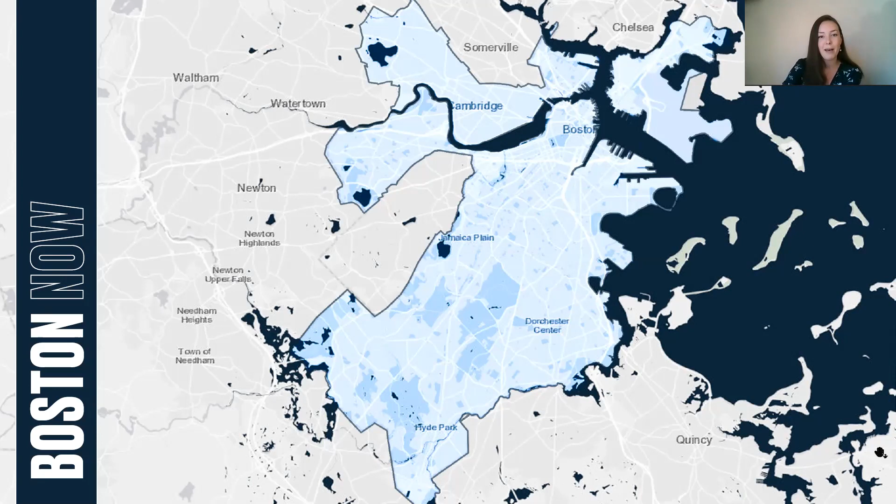So most of you know that this is Boston today, and some of you Bostonians might recognize your neighborhood here on the map. If you want, you can type that into the Q&A box where you're from.

These are the challenges facing Boston in the future. Some of these are the largest effects of climate change: extreme heat, flooding, and coastal storms. Although this may look like a lot of the city is affected, and it is, we really hope to create a hopeful approach today and understand how design can help reduce these challenges.

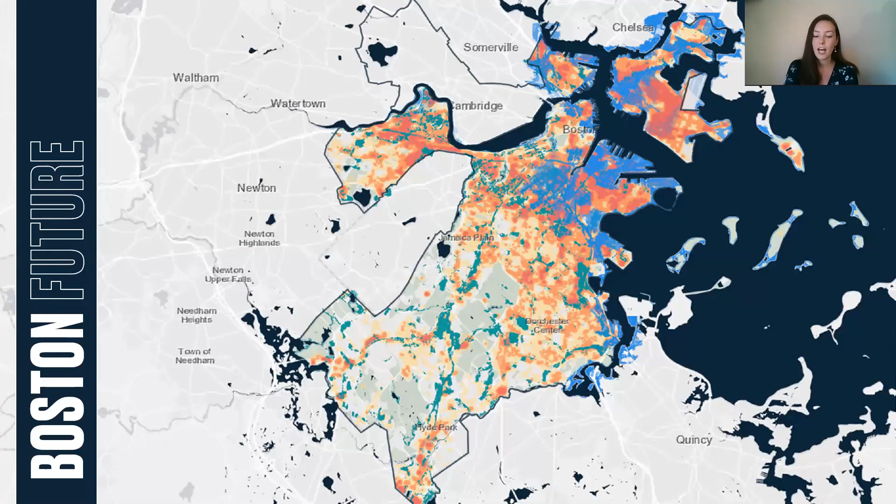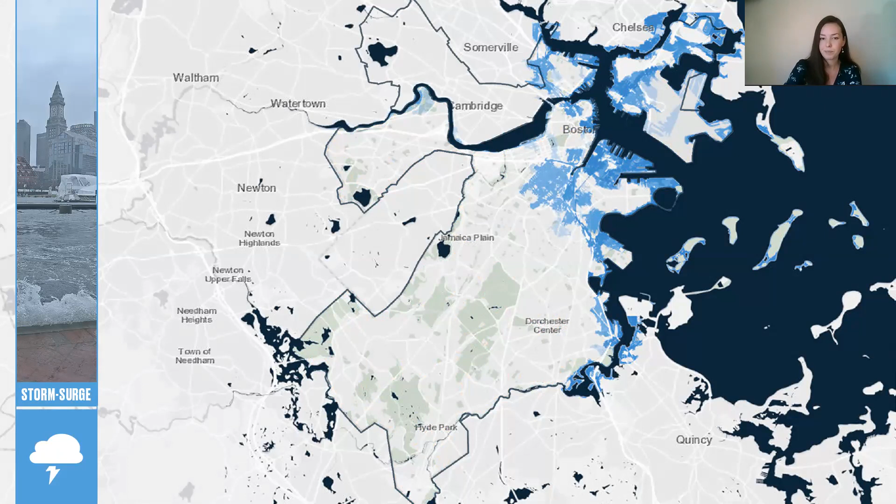So we'll start with storm surge. Because Boston is surrounded on most sides by water, sea level rise is one of the first things this city researched. This map shows areas of Boston that will flood in the next 100 years, but it may also flood up to 2 times a day depending on high tides. Rising seas and more powerful storms cause heavier rainfall in shorter periods of time, and with fewer places for this water to go, many of those low-lying roads and areas will start to flood more frequently. Some of you may have noticed already flooding as you walk, bike, or ride around the city.

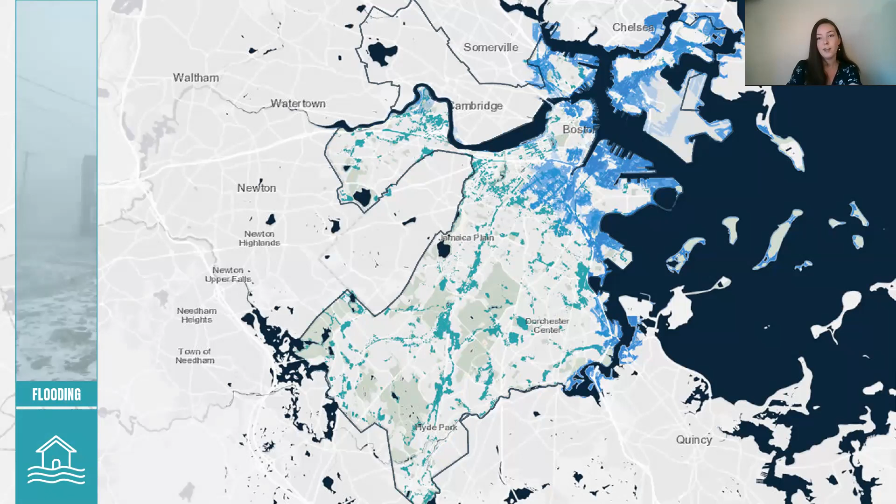You might be wondering what all this red is. The darker the red, the hotter the area is. Although we do have a lot of parks and green spaces in our city, it's also like a lot of other cities made up of asphalt, concrete, and other surfaces that trap the heat and make it even hotter. Excessive heat is one of the biggest problems caused by global warming because it leads to droughts, fires, and uncomfortable living conditions.

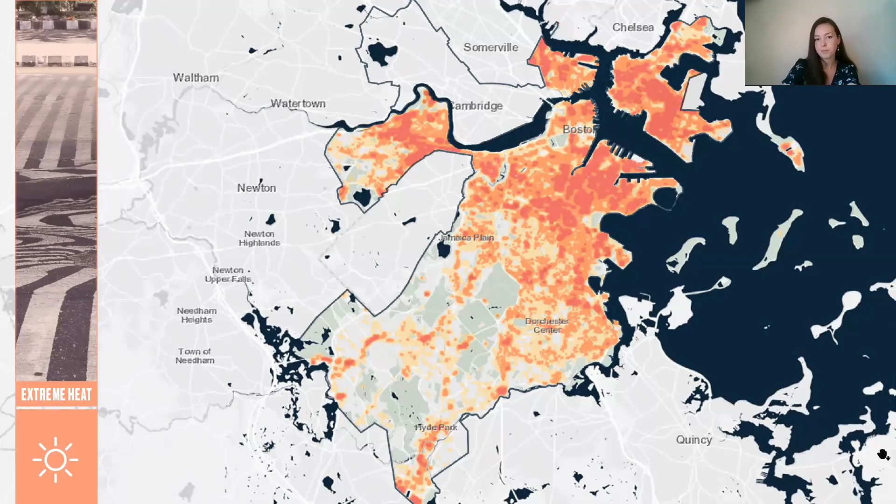But there's plenty of things we can do about all these things. Over the last several years, the city of Boston has started to make plans to make our city more resilient to the challenges caused by climate change. In this effort, there are landscape architects, engineers, and other designers who are all working together to reimagine our shorelines, our city, and all the buildings that make our city.

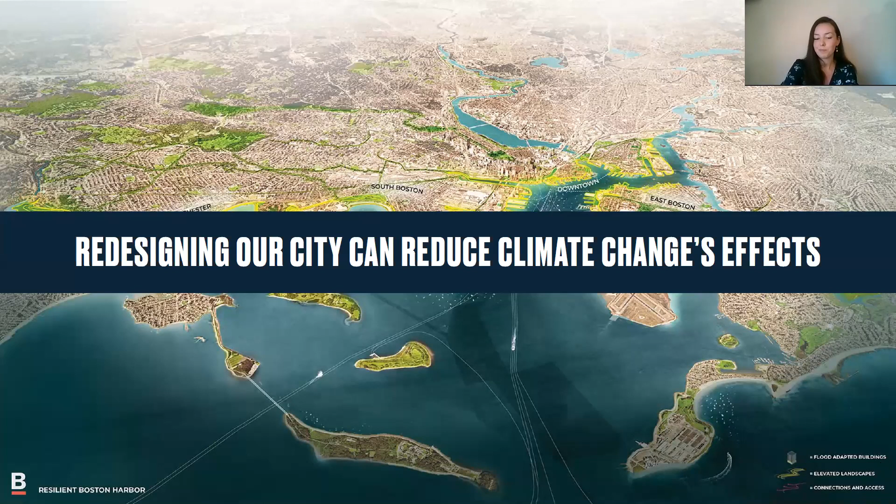Designers also need to think about not only how to solve for climate change, but they also want to design to reverse climate change. In the next several slides, you'll start to see how designers are doing just that, maybe focusing on flooding or on how to reduce global warming overall.

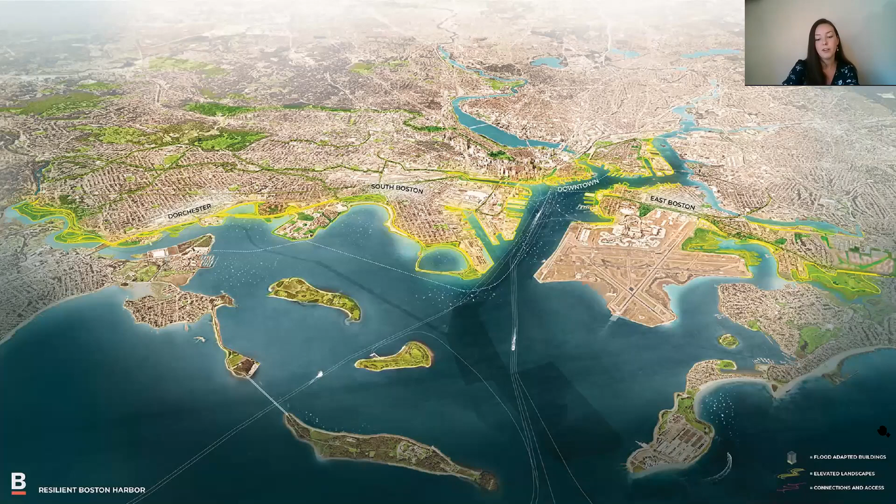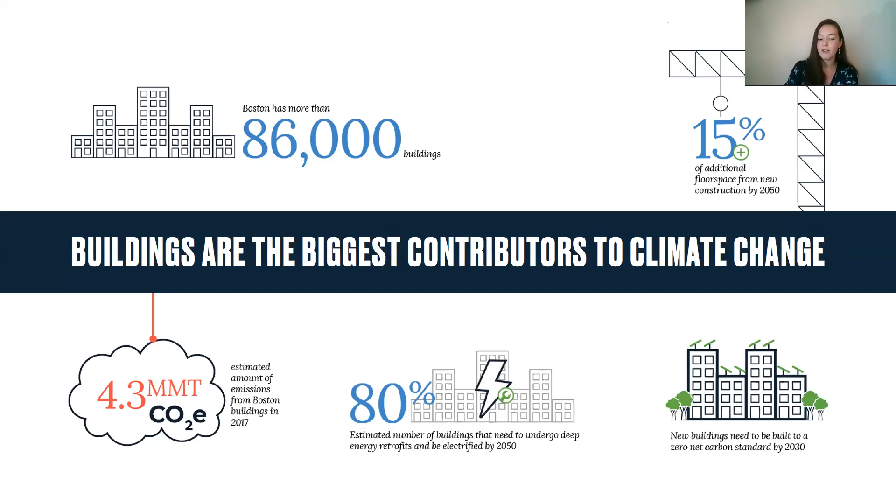One of the biggest causes of global warming is an excess of carbon in our atmosphere, and buildings are some of the biggest carbon emitters, so that's really what we should focus on. Boston's buildings account for about 71% of carbon emissions through energy use and construction. With many buildings to repair and build anew over the next several years, the city has a new set of standards so that in the next 10 years, buildings will have to lower the amount of carbon emissions they emit into the atmosphere.

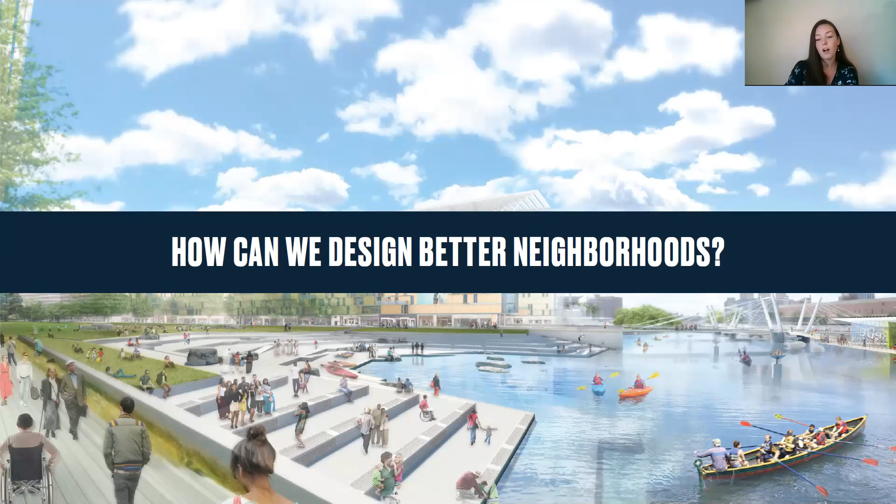Our neighborhoods, like many of you mentioned before, are made up of buildings, parks, and infrastructure like roads, bridges, and sidewalks. The way we design our neighborhoods can help lessen the effects of climate change while also making them healthier and more beautiful places to live.

So go ahead and type into the Q&A box what you see here in this image. What are some of those features in this neighborhood design that are helping to tackle climate change?

So I see no cars. People are seeing solar panels, water at the edge of the neighborhood. People are noticing trees, definitely noticing the water. Someone notices that it looks very clean, the air looks really clean. That's pretty good, very nice. Green buildings. Stairs so that the water can rise without damaging property. That's a pretty good observation. Rowboats instead of electric boats. Really great answers, clean water. So you guys sound like you know what you're talking about.

I see a lot of those things too, and you might not recognize this neighborhood at all. That's because it's a design proposal by a local architecture firm, for a waterfront neighborhood downtown. With many of their design choices that you see here, they are trying to address some of the challenges we were just talking about.

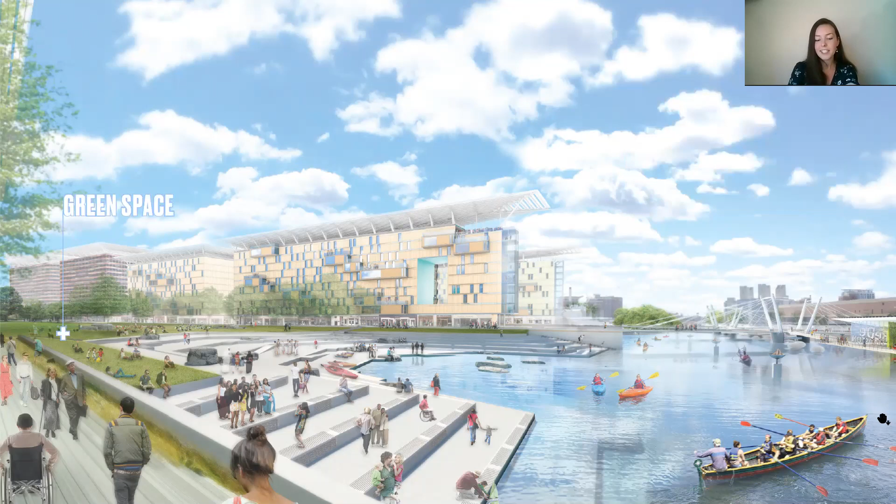In this neighborhood, I see green spaces that help to protect the buildings around it from flooding, while also decreasing heat in the whole area, helping to absorb, shade, and cool down the neighborhood. There's a step shoreline that allows for higher tides to rise up slowly and for the water to be absorbed into the grass, protecting the buildings around it.

Even the buildings themselves do this as well. They have space for ventilation, which means air can pass through them and cool them down. You can see that through the cutouts throughout the buildings, and then plenty of space below the roof.

Those roofs probably look a lot different than the roofs in your neighborhood. They definitely look different from mine. But they are cool roofs, and they provide shading for the building with that big canopy. The white color also helps to bounce off heat and cool them down. On top of the roof, there's also solar panels, which help collect energy from the sun to reduce the amount of energy that the building has to use overall.

As we're zooming in from the city to the neighborhood scale, we can now zoom in even further to the building scale. The same design choices that happen at the neighborhood scale happen to make better buildings that have lower carbon emissions and a more positive impact on the environment.

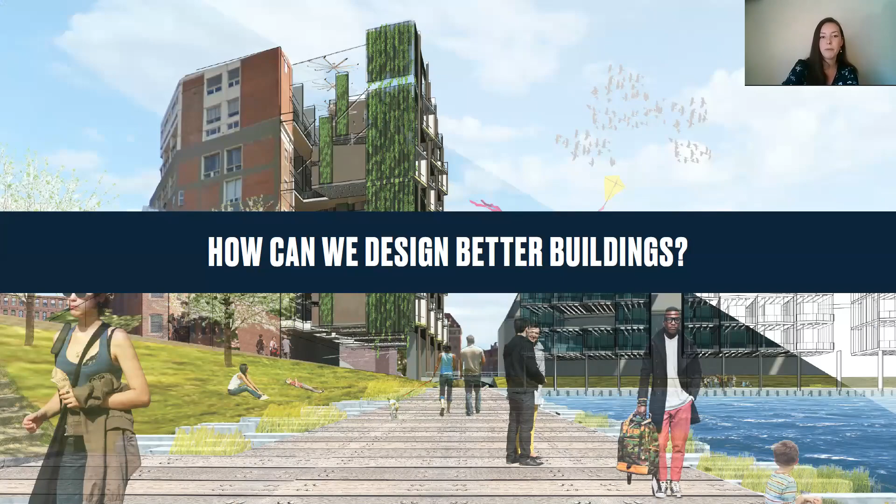Designers have many different tools they can use to make their designs low impact. They can decrease the effects of extreme heat by using ventilation, bringing in air to help cool the building down. They can orient the building and position windows and doors to allow more air flow, and they can use plants and greenery to shade buildings and outdoor spaces, creating cooler climates with cool, fresh air.

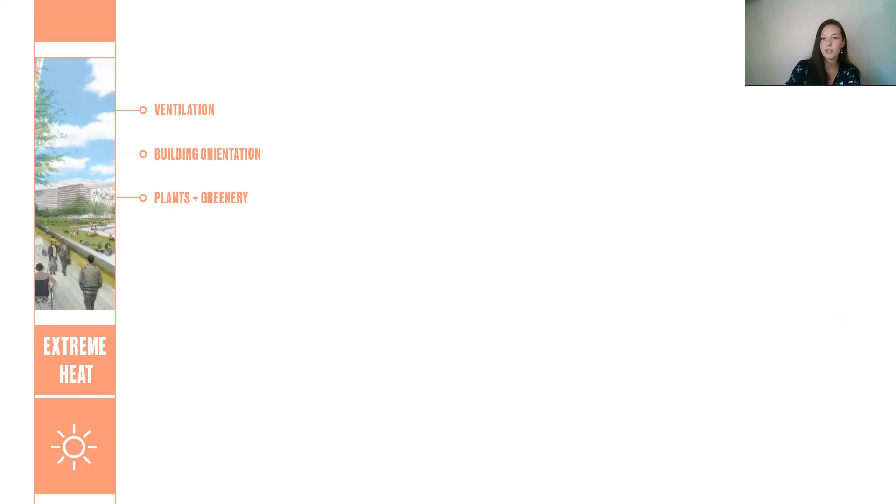To make sure buildings are safe from flooding and don't flood others, designers can use landscape techniques such as step landscapes or stepped shorelines to help manage water. They can elevate buildings away from the water, or relocate building services, meaning the boiler and mechanicals that run the building are moved up so they're not flooded on the lower levels.

Lastly, they can also reduce energy, and one way is by producing your own through solar panels, geothermal, or wind. You can also use building orientation, turning the building so it faces the sun, and use material choices that create an energy efficient exterior. There's really a lot you can do to help lower a building's impact.

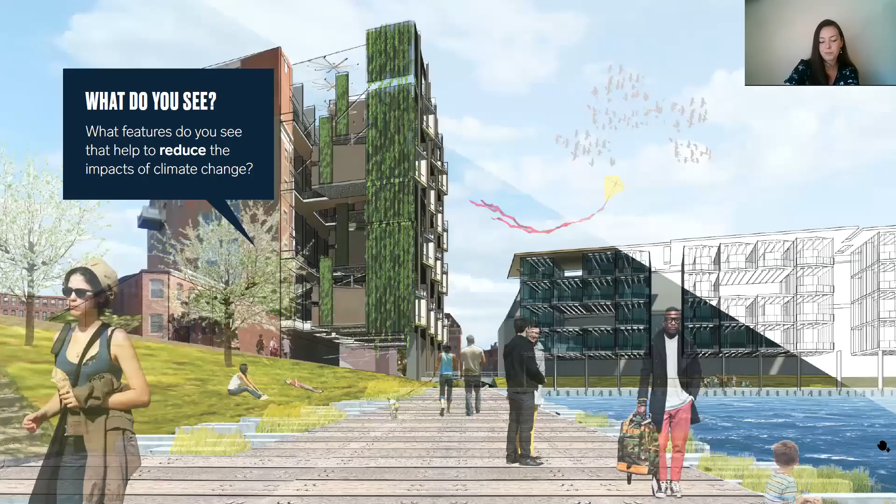So like we did before, go ahead and type into the Q&A box what you see here. What features of this building stick out to you that might help tackle climate change?

People are seeing the green wall, trees, greenery, something on the roof - yeah, I see that too. Open space, clean air - these are all really good answers. Park, solar panels, wind power, water. It's great, very nice. Looks like you guys can do my job for me.

This building is a design proposal, another building that doesn't exist yet but hopefully will in the future. It's done by another local architecture firm, Lab Architects. Like you all started to observe, I see living walls, which help cool the building down and purify the air around it. You'll be learning a lot more about living walls and how they work from EcoRise later today.

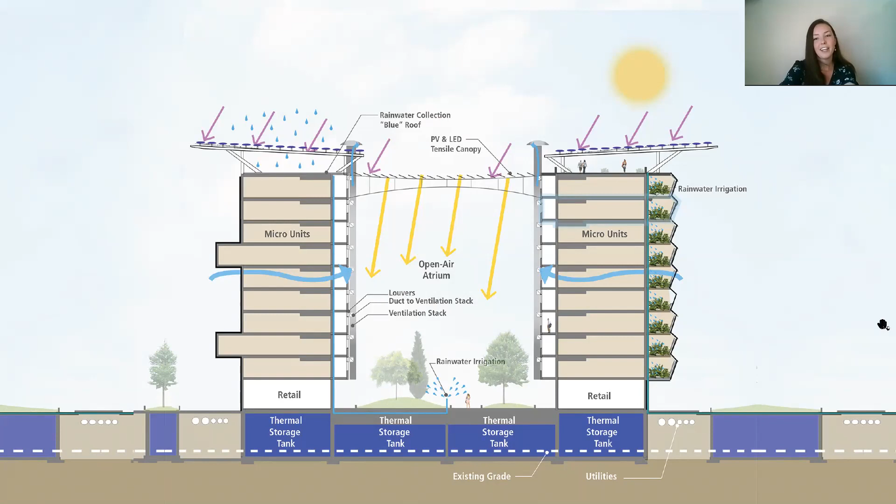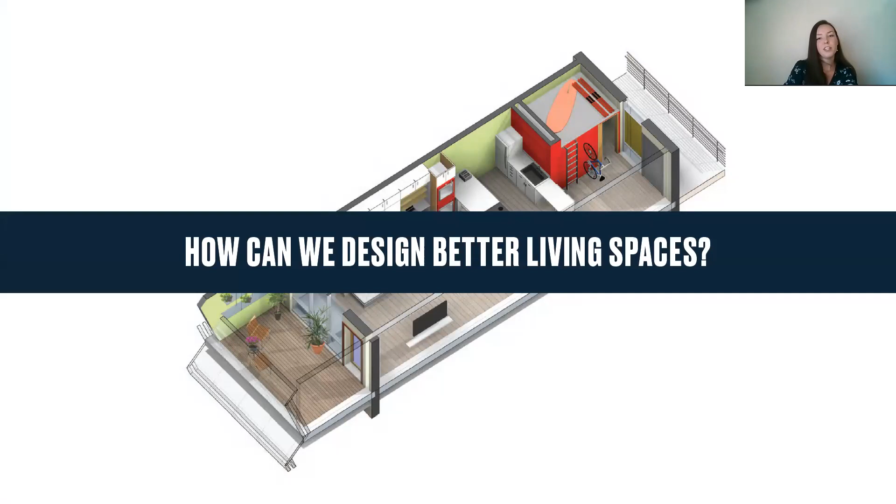Even a small unit of housing can do the same things design has been doing at the city, neighborhood, and building scales. These micro units allow for living in less space, meaning less materials and energy used, and everything within the unit has a purpose and function so nothing's wasted.

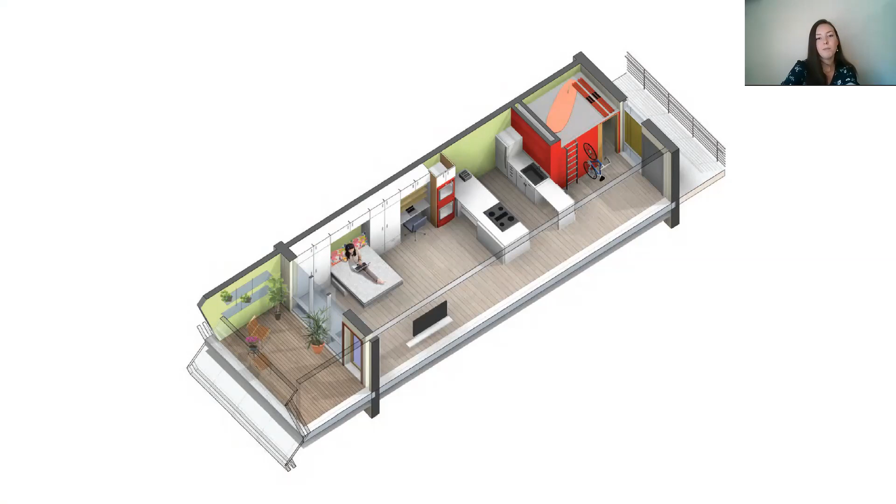Micro units are designed in many different ways. Some are within other buildings like the one we saw, others stand alone, and some have more than one level. This particular example shows a one level design, with a balcony of green space that helps absorb the sun and cool the building down, as well as purifying the air for the unit.

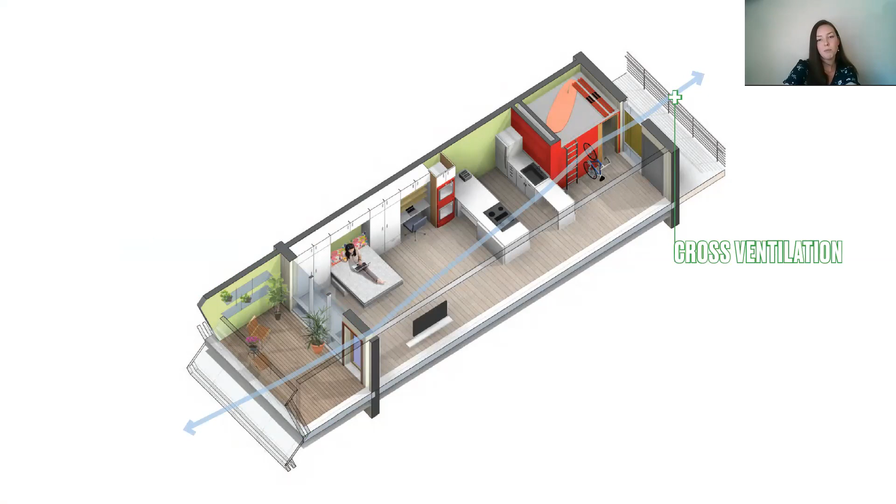Having openings on both sides of the unit, which many of our homes don't have, allows for fresh air to flow through and provide ventilation. The space within it provides many different functions in one, so someone who lives here might use this space for relaxing, cooking, working, or sleeping. Being in one space with fewer rooms cuts down on the amount of electricity and energy used overall.

So raise your hand, or use the button below, if you see yourself living in a space like this, maybe in the future. I do see some hands being raised.

I wonder if anyone can say there's another name for a micro housing unit that's actually freestanding, meaning it's not part of another building, it's just a separate building. Does anyone know what that's called?

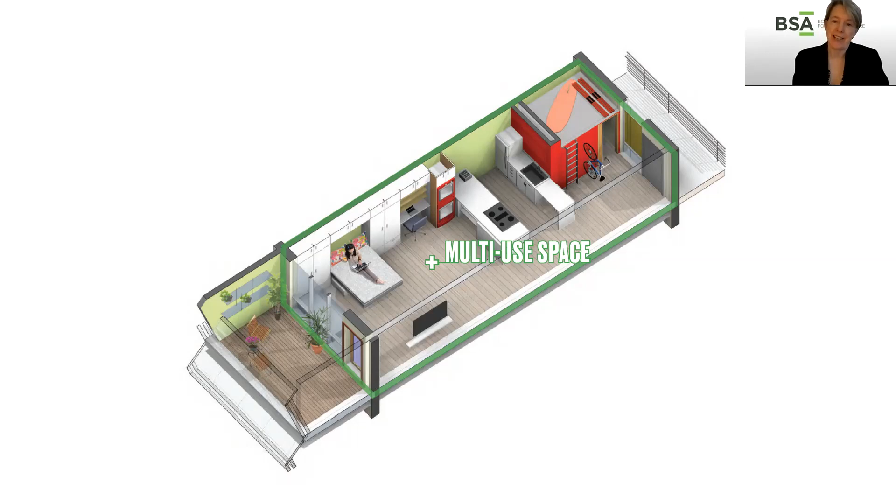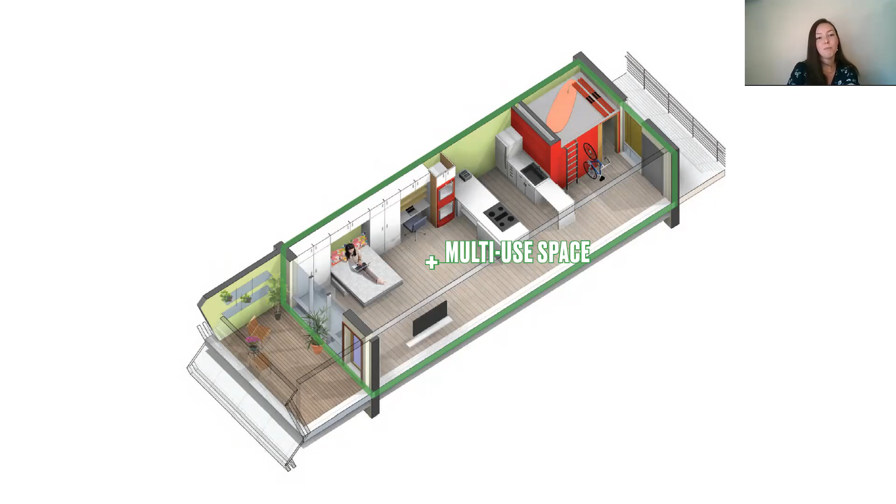Well, lots of people are raising their hands. I'm glad, that's great. So it's your own little tiny house. That's exactly what a tiny house is, a micro housing unit. Terrific, and people keep raising their hands. So a lot of people might be living in these in the future, and I know I would definitely be interested in living in a space like this. Hopefully we'll see more built around the city as the years go on.

We've covered many different scales of design in this short time, from as big as the city to as small as a micro unit. But hopefully you've learned they're all designed the same way, using the same tools, which can help lessen the impacts of climate change and have a more positive impact on the environment at large. We also hope you learned something new about design today that you might want to include in your Make It Green design projects later this week.

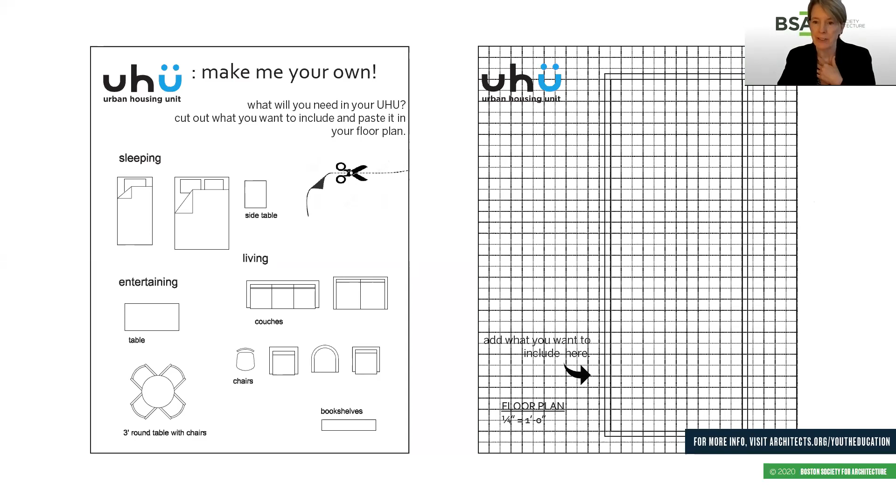All right, thank you. I'm going to get my screen set up for you guys, and we're going to talk a little bit more about that living wall that you most likely have heard a lot about on Monday. I know that Kellyanne mentioned it, and I know a few folks from Suffolk mentioned it. So we're going to go in depth about our living wall.

So who am I? I am Zakia Grant.

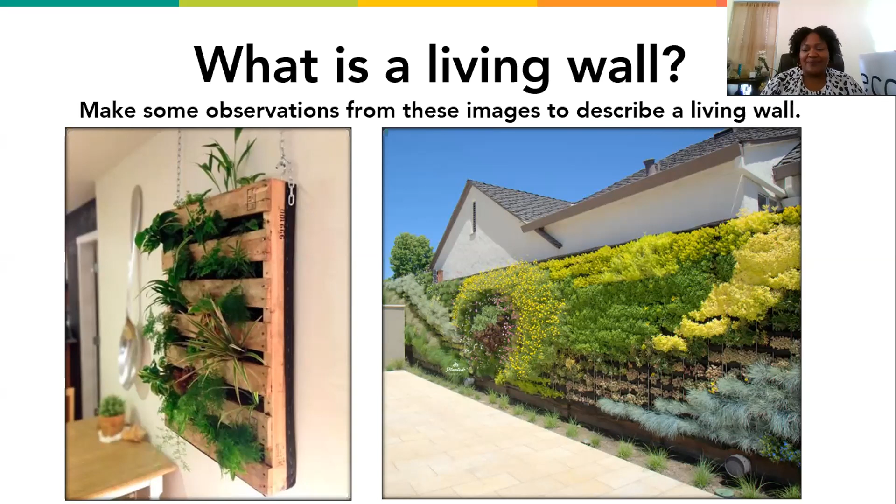So how can living walls reduce air pollution and save water and reduce runoff? Let's talk about these two things now. We know plants are important - plants help us breathe better, that's why they always advocate for having trees around. But when you can't have trees around, or if there's no forest nearby, living walls can be a great alternative. Plants can filter the air from particles such as car exhaust and make it easier for us to breathe. Those particles also impact climate change, so these plants can positively impact our communities.

They can also save water and reduce runoff. Raise your hand if you know what runoff is. Okay, we're getting a few people raising their hands saying they know what runoff is. Now, runoff is when water hits the ground, and it's especially important when water hits a paved surface like we have in our urban areas.

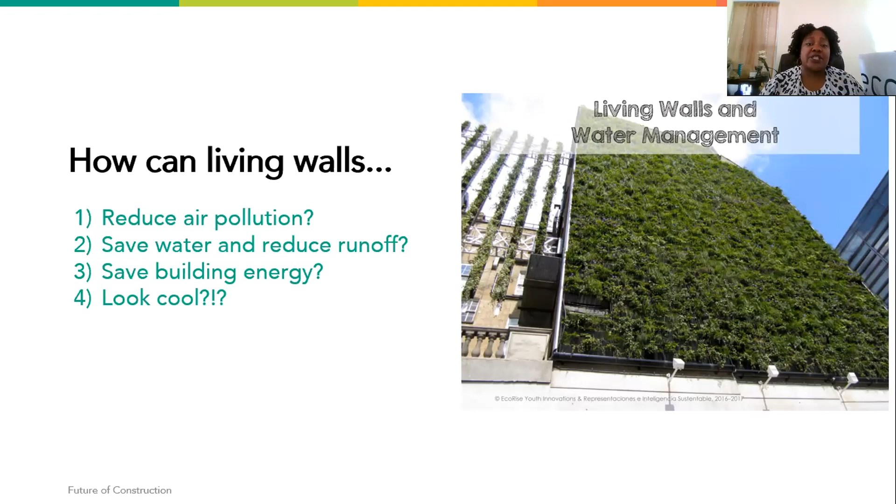That water will collect everything on that paved area as it moves to either a sewer or a body of water. Things that could be on the ground are oil from cars with oil leaks, particles from vehicle exhaust, and if people don't pick up after their pets, that's on the street as well. All of that can run into our nearest bodies of water and have a negative impact on water quality. So what a living wall can do is prevent some of that extra water that would normally get into our drainage system or run off into our bodies of water. They can collect that water and use it for our plants to grow and have all those positive benefits.

Taylor talked a lot about buildings and building surfaces and how buildings can use a lot of energy. Raise your hand if you've ever walked on hot pavement in the summer. A few people, okay, so that pavement is pretty hot. Different materials similar to street pavement or sidewalks are also used in making buildings. So the sides of our buildings can be very hot, and that means cooling them down on the inside requires a lot of energy. If our living walls can substitute for that hot building surface, we don't need as much energy to cool the building down inside. And we can also make our buildings or local areas look cool with our cool designs.

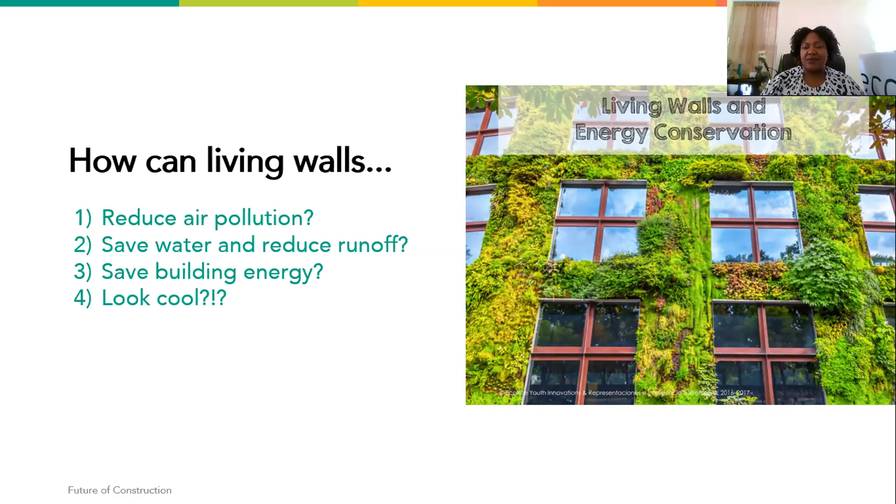Is there any questions before we move on to our wonderful living wall example designs? Is there any questions coming in, Gamal, that we need to address?

Yeah, one of the questions is coming from a person who's interested in weather and climate. For example, in Boston, there might be weather or climate that's different from other parts of the country. What advice would you have about picking plants that could survive in your area?

That is a very good question, and this is where you as a designer come in. You may want to choose plants that stay green for a longer period of time that could survive the harsh winter. You may want to choose plants that, when they go dormant during the winter, don't look as bad, but really perk up in the spring. So plant choice, as you'll see in a few minutes, is really, really important when you design your living wall.

But that is up to you as the designer. So we're going to see some examples, and we'll get more into that when we talk about designing.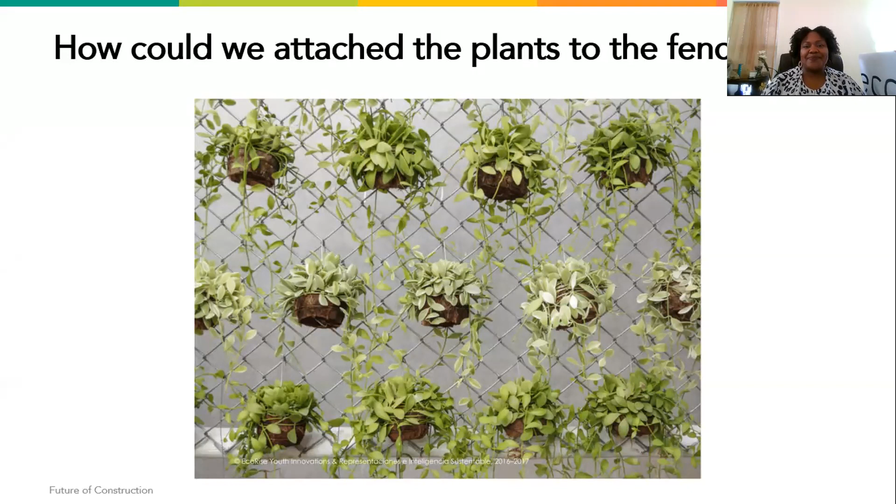Someone said they would like to use some kind of Velcro or tape to attach the garden portion to the wall, and someone also said you have to be careful with drywall. So I'm wondering if you could tell us what drywall is. Okay, so drywall is the material that you find on the inside of homes.

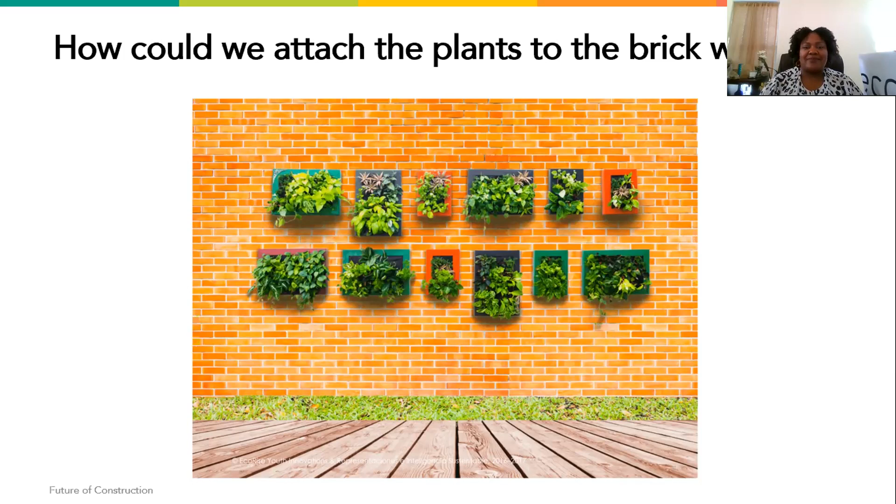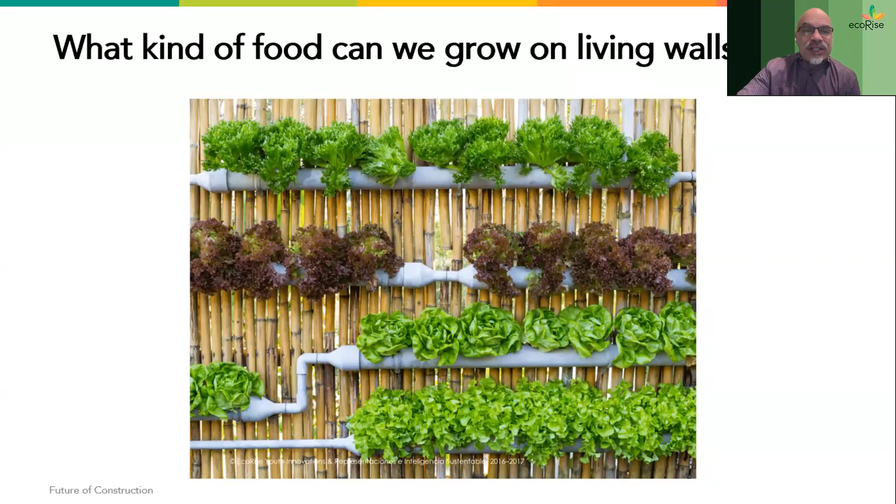And I don't think there's any other heat resistant or cold resistant plants worth noting, so do a little research on that. Another person said evergreen plants, which is a very specific type of plant that you mentioned before. And so we're going to talk a little bit more about really looking into what type of plants should be in there and who actually has a career in that.

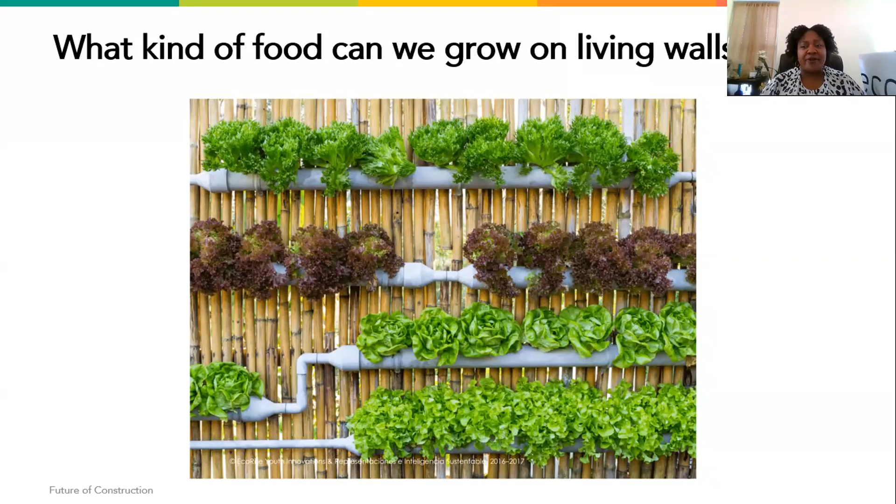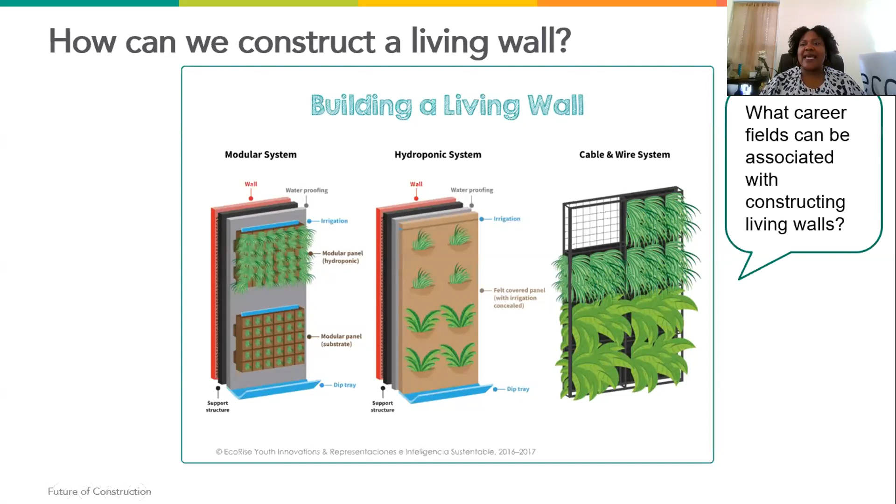So I'm going to take a second to think about, when we're trying to construct our living wall, what career fields can be associated with constructing living walls? We mentioned needing specific plants, and we talked about integrity of structures. If you can't name the exact type of person, you can give a description.

One thing we're seeing is that a gardener would be involved, or a landscape architect. Even people who are masons, who work with brick and cement, should know about this. People who work with wood might be called carpenters. And when you think about people who put everything together, the plants and the material, like the growing apparatus, maybe an architect would have to know about how all the different materials work together.

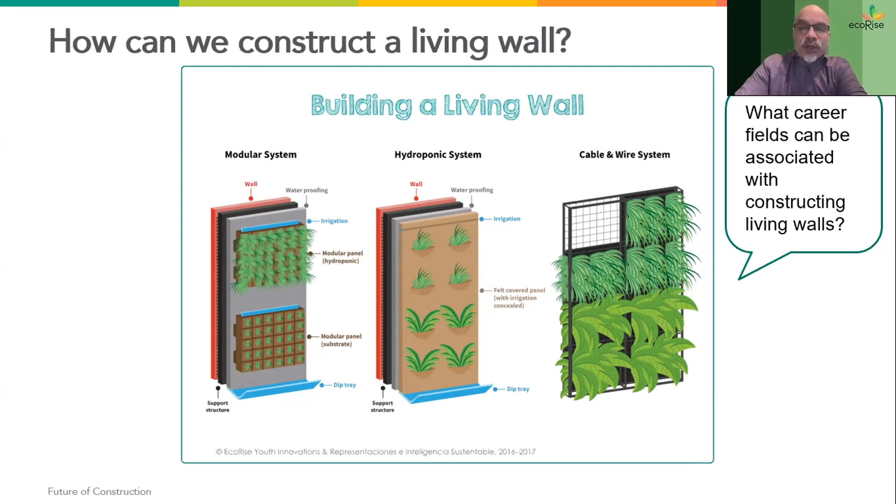I'm going to add one more person, because there's been a lot of talk about what plants we should use. Besides a gardener, we can also use a horticulturist. We can use interior designers too, if we want a special look to our building, our living wall. So we had one where we're using different color flowers to create a pattern. The horticulturist and the interior designer may want to get together and figure out how they're going to make our living wall important to climate change, but also very beautiful.

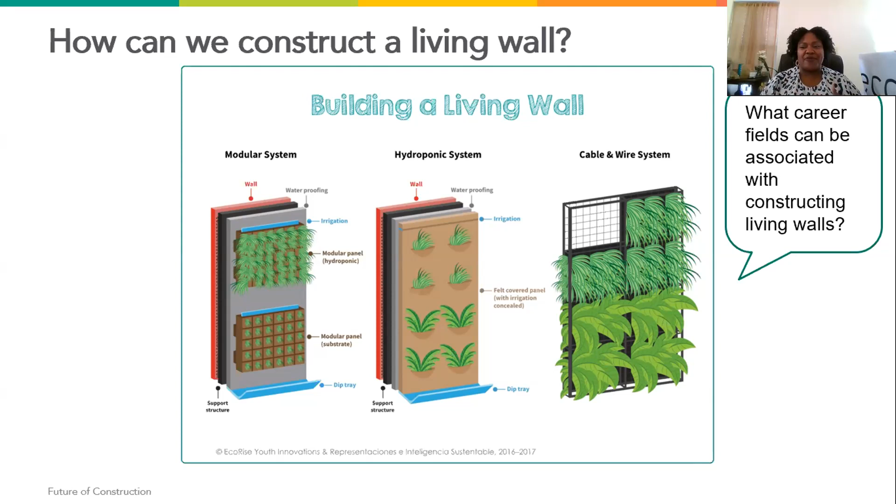Okay, so growing media. I've been talking a little bit about that, and I mentioned an important growing media, but it is any material in which a plant's roots can take hold and from which the plant can absorb water and nutrients. So there's probably one obvious example of growing media.

Does anybody know? Place it in that Q&A. And if you have other examples of growing media, because there is more than one.

So I see that one person mentioned soil, and that's very important. That's the most obvious growing media that plants can grow in, and that's where we see our trees or grass and everything in nature. But when we look at different types of gardens, there are other things that plants can grow in that don't require soil.

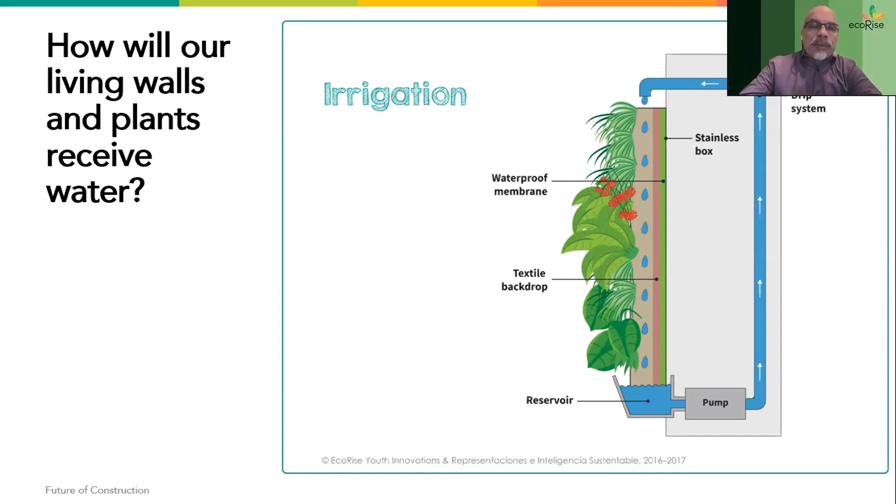Especially if maybe we don't want to use a pump, do we have any ideas? Someone said that if you can capture rain, that would be a good start. And that reminds me of what Taylor and Polly were talking about. If there was a building and you could capture the rain from the top, you might be able to bring it down into your walls.

So, collecting water, you can use rain barrels. You can even use water that has been used in the building before, depending on what it's been used for. Once you've washed your dishes, you can use that water instead of having it go into the drainage system or the sewers. You can use it one more time to water plants that will help filter the air, and any water left over can be recirculated before finally going into the system. So using things like what we call gray water.

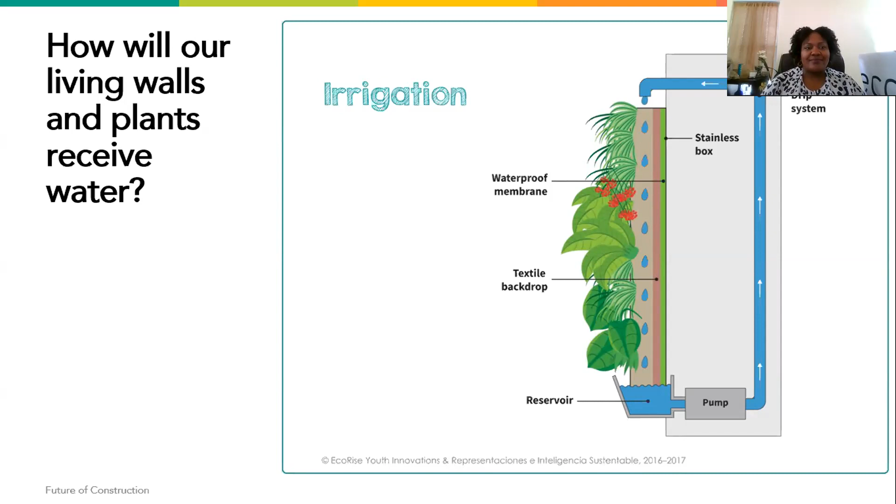All right, you guys are doing a great job. If you want to work on designing your own living wall, we have some materials that can help you think about the design you would like to achieve. We have a worksheet called Design a Living Wall.

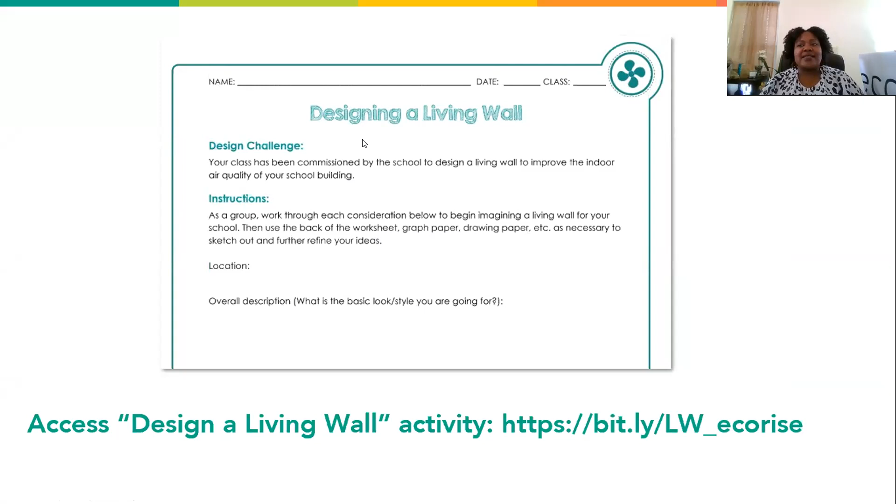And you should see that link being popped into the chat, and you'll be able to access that. And then if you want an example of a really cool living wall that you can design, we have directions on a specific living wall that is very simple, doesn't require a lot of electronics or a pump. This is going to be a hand-watered system, using things you might find around your house. This one uses an old dresser drawer, okay, and a couple of other materials, and you can put special plants in there, you can choose your own plants. And so that is our hanging garden activity. The link should be in the chat for that right now.

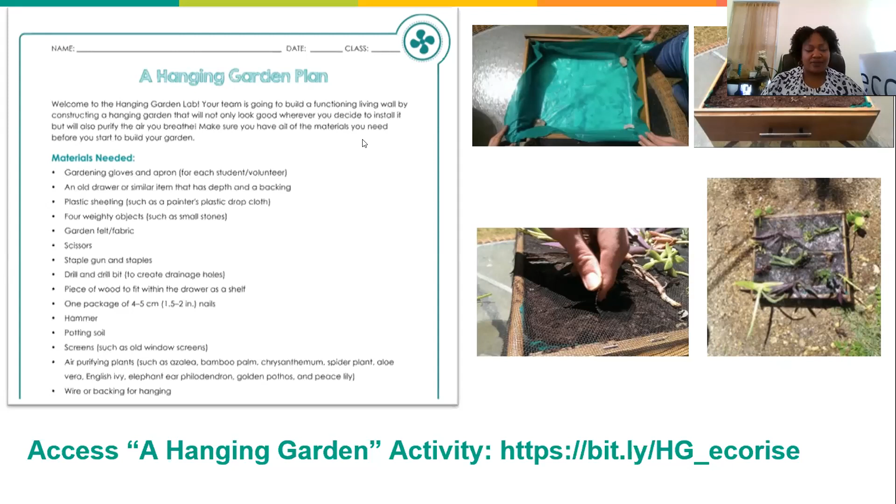So using both of the presentations for today, we would love for you guys to design something excellent. And we have a cool down prompt, and we can also do some Q&A during this time. Well, what will your living wall look like? There are some things you need to think about before you start sketching what it's going to look like. What's the purpose of your living wall? Are you going to grow food in it, or use it for making the neighborhood look nice?

Where will it be? Will it be in a backyard? Will it be on the side of a building? Will it be downtown? What will it look like? Do you want a pattern in it, or do you want it just to be a stretch of green? Once you think about all of those things, make a quick sketch. So if you have any questions at this time, you can go ahead and ask.

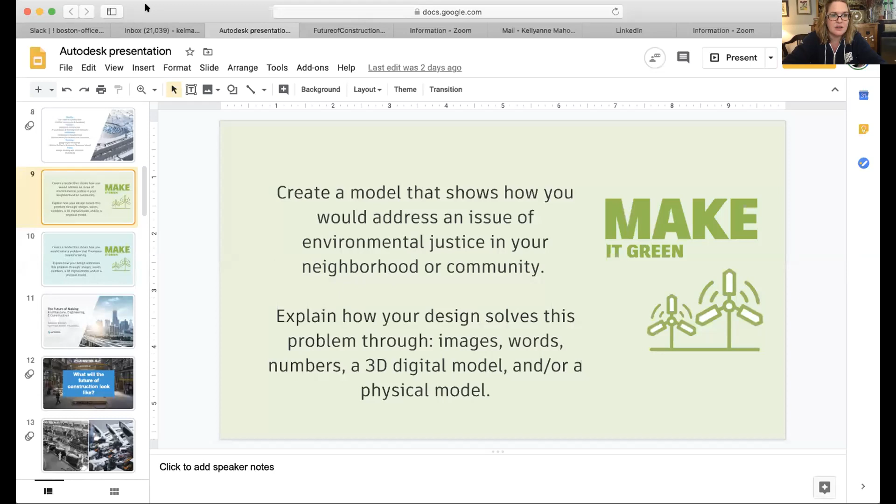Cool, so these are the two design challenges that we're going to dig deep into tomorrow. Melissa is going to talk about the issue of environmental justice. In thinking about climate change, we know that climate change impacts different communities in different ways. She's really going to get specific about environmental justice and how we can enact it in our own communities.

So you will have two choices in terms of the design prompts that you want to address. This is the first one: create a model that shows how you would address an issue of environmental justice in your neighborhood or community, and explain how your design solves this problem through images, words, numbers, a 3D digital model, and/or a physical model. Sometimes we think of a model as a really technical term, but it really just is a way of representing your knowledge and the ideas you're trying to convey in more than one dimension. So images could count, words could count.

I know my math teacher friends would be excited for me to also include numbers, because informational models primarily use a lot of numbers. I will show you on Friday how to use Tinkercad to make a 3D digital model.

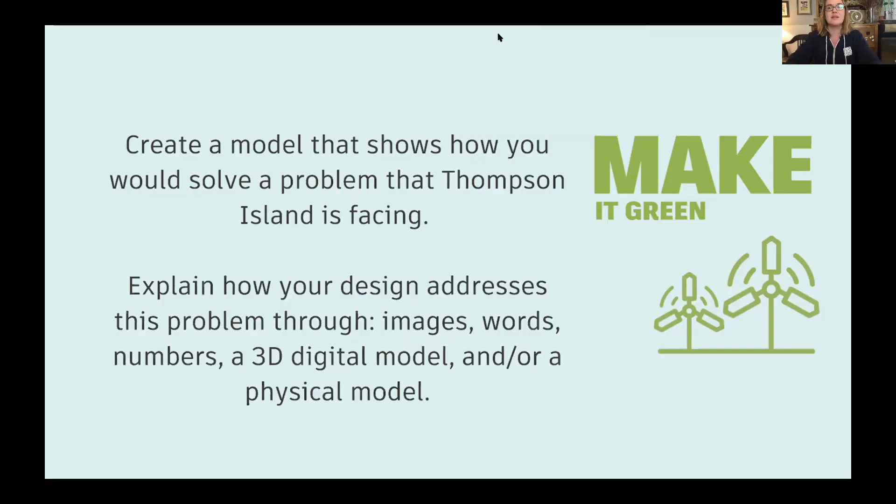Oh, glad we got to JB's comment. JB asked about the next steps. Good to see you, Mr. JB.